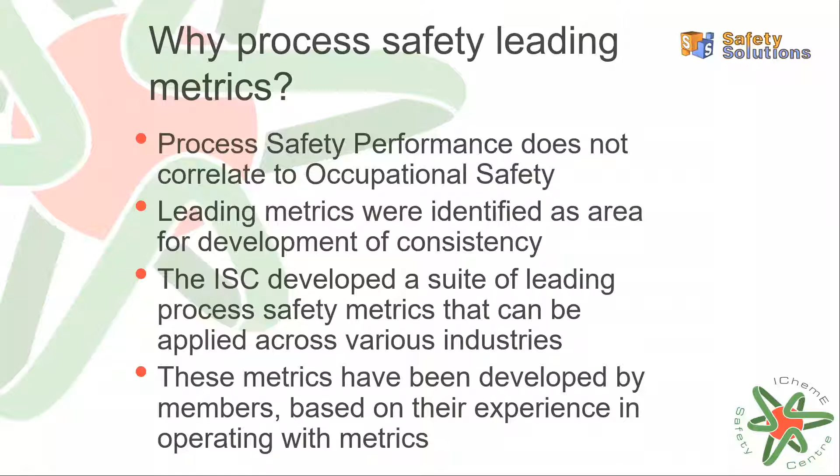This is why we also need to focus on the leading side of process safety, to challenge the green results, and not just be comfortable that we've reached the level of greens in lag metrics and decide that's all we have to do. We have to challenge the system, and also take the message when something goes right as an example, continuously working in other areas to improve based on good results. So it's not all about finding gaps and errors, it's also about finding what works really well in the facility.

So these are the metrics, and you can see the color coding here. These color codes associate with the 6 pillars in the framework. We have all the elements of the framework on the left-hand side, and the associated metrics on the right-hand side. The alarms are associated with human factors elements. These elements can overlap, so some metrics can be associated or related to other areas as well, but we think these are the ones they most crucially belong to.

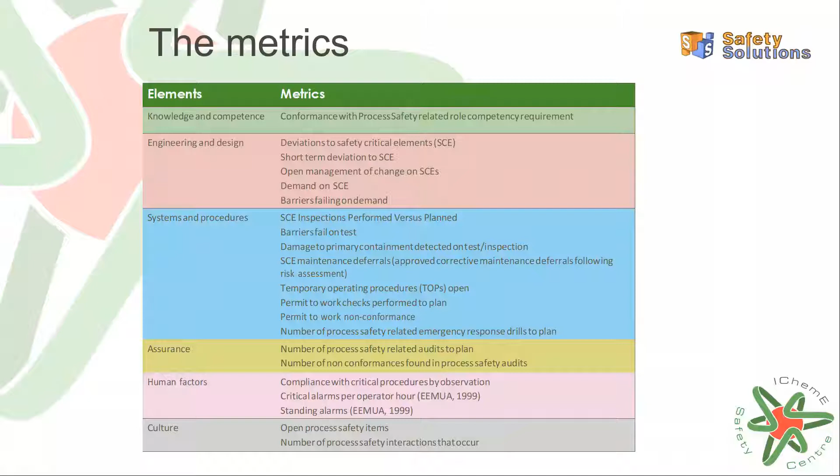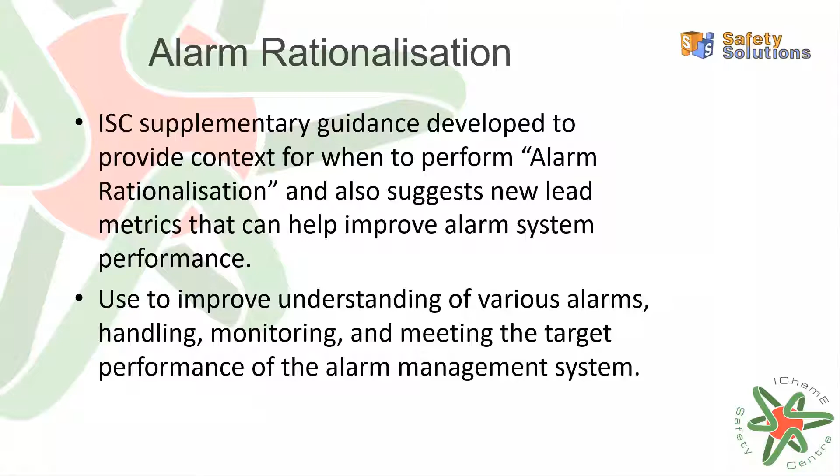So why bother managing alarms in the first place? I'm going to give you a few incidents now where poor alarm management has really been one of the contributing factors - maybe not the major issue, but certainly one of the things picked up by the investigators.

The other reason why you should be doing alarm management is that most industry regulators, if not all of them, will be asking you at some point what you're doing about your alarms, how you monitor your alarms, and how you know your system's good for managing those.

Recognised and generally accepted good engineering practice - this RAGAGEP - is linked into a lot of the codes, standards, and industry regulators' guidance. To give you one example: the HSE UK has a good guidance note, out for about 25 years now, called Better Alarm Handling. You can look that up if you're in the UK, and even if you're not, it's a good place to start, along with some of the other codes and standards I'll show you later. I'm sure WorkSafe here in Australia, NOPSEMA, and other regulators will have similar guidance notes.

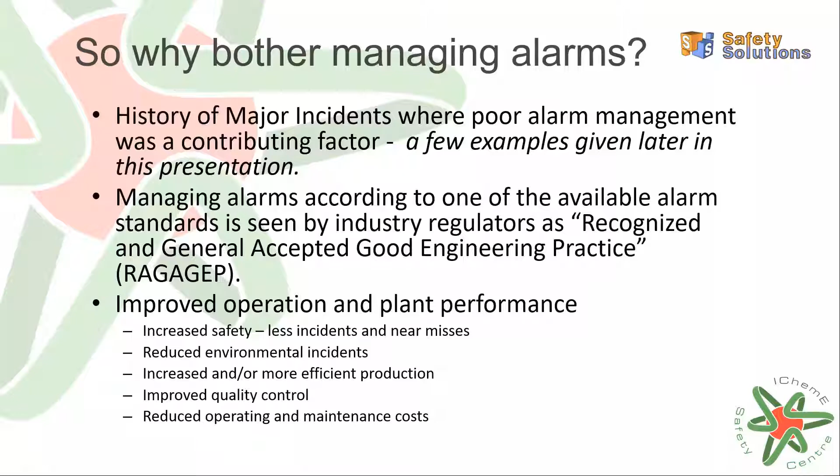The other good reason is obviously to reduce the chance of incidents, or at least give you a chance of reacting in the right way if they do happen. Some of those things listed at the bottom, not just safety but also environmental issues, could be increased production, or less chance of upsets due to incidents on the plant leading to a production loss. Things around quality could be an issue, and also operations and maintenance costs could be reduced as a result of people reacting the right way to their alarms.

The first incident I wanted to talk about was Texaco Milford Haven, which often comes up when people talk about alarm management. This happened in the UK in 1994. A large number of alarms made it difficult for the operator to assess what was going on. I'll talk you through the actual event and then come back to that alarm issue.

In July 94, a series of events led to the accident starting on the morning of Sunday the 24th of July. A severe electrical storm caused plant disturbances that affected the vacuum distillation, alkylation and bituminous units, as well as the fluidized catalytic cracking unit, called the FCC. The crude distillation unit that provided feed to another cracker unit was shut down as a result of a fire that occurred at that time, started by the lightning strike. During the course of that morning, the other cracker unit was shut down, but the FCC was left on.

The direct cause of the explosion, which occurred some 5 hours after that first fire, was a combination of failures in management, equipment and control systems during the plant upset. This led to a release of about 20 tons of flammable hydrocarbons from the outlet pipe of the flare knockout drum of the FCC unit, which was the unit that was left on.

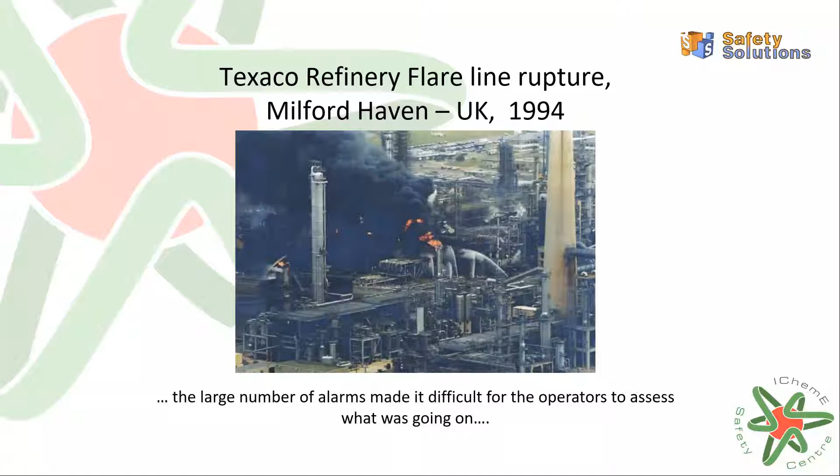There is actually a report available by the UK HSE on their website, HSE.gov.uk. One of the key findings was that the control panel graphics did not provide the necessary overviews to allow operators a good chance of reacting in the right way. There was lots of confusion due to the excessive number of alarms in the emergency situation, which reduced the effectiveness of the operator response. They probably got flooded with alarms, and with so much going on at the same time they were confused, which ultimately led to the blockage and the failure. So that's the first one.

The second one is a bit closer to home for me. When this happened, I was actually in the UK, and this is an incident that occurred in Victoria, near Melbourne, so Longford. I was in the UK at the time it happened, but it went around the world eventually, because a guy called Andrew Hopkins wrote his book, Lessons from Longford, and he actually came to visit our refinery a few years later after we had an incident. It's amazing how these things eventually get around the world. So it's not just about safety, production, and all the other things, but it's also about the knock-on effect to your business and how that affects the wider community and international recognition for the wrong reasons.

So you can read Andrew's book, which is now over 20 odd years old. You can read the IChemE article where Trish Kerin from the ISC interviewed Andrew a couple of years ago. That's available on the IChemE website, called The Long View of Longford.

And the other thing is the Longford Royal Commission, which was the local commission that the Parliament of Victoria asked for, which was published in 1999.

Now I'll give you an overview of the actual incident itself. As you can see here, they had 300 to 400 alarms daily - this was picked up during the incident investigation - and up to 8,500 during an upset condition. All of this was accepted as normal, and this was listed in the findings of the Royal Commission.

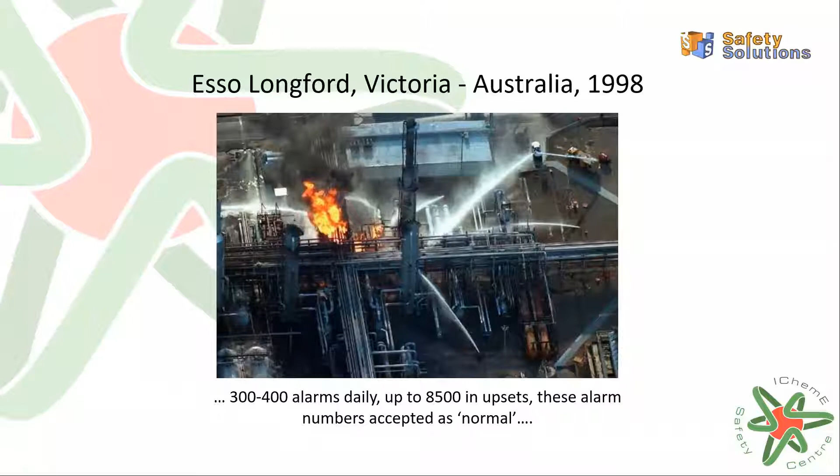Okay, a couple more that are probably more widely known around the world, certainly in the oil and gas industry, in more recent times.

Texas City has been widely used as a case study in lots of process safety courses, including the IChemE Fundamentals course. Again, there's problems with lots of alarms either not working or giving the wrong signals, and some of these were ignored during the incident itself.

Texas City is in Texas in the US, owned by BP at the time, after taking over from Amoco a few years before. It occurred on 23rd of March 2005. A hydrocarbon vapor cloud was ignited and violently exploded at the isomerization process unit at the refinery. Hydrocarbons originated from liquid overflow from a blowdown stack following the operation of the raffinate splitter overpressure protection.

So there were 15 people killed as a result, and 180 people were injured, mostly the local construction village workers who were in a meeting at the time. It was too close to the plant that blew up, and it severely damaged the refinery, as you can see here.

What I'd suggest for anyone who doesn't know about this is to go onto the CSB, the US Chemical Safety and Hazard Investigation Board. Their videos are brilliant for learning from, and one of the ones they've updated a few times is this one on Texas City. If you look in the CSB videos section, there's even ones in different languages now, like Spanish and French as well as English, so you can share that widely and learn from it.

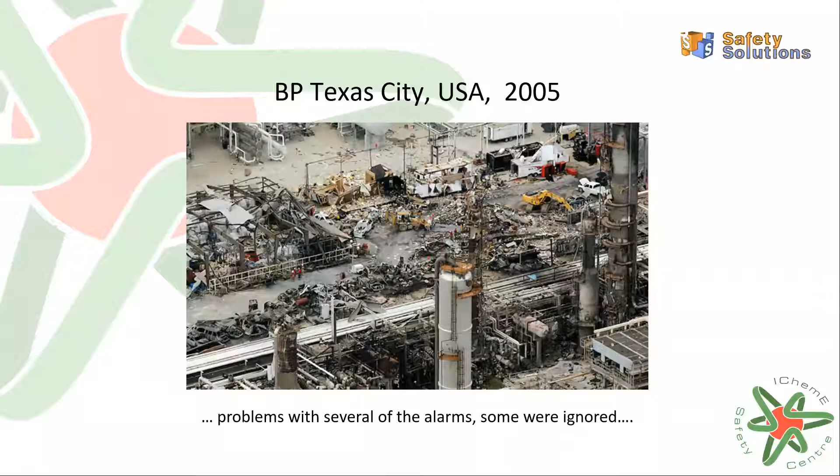Buncefield came up last year when I presented on overfill. Buncefield, UK, same year as Texas City - a bad year for process safety incidents. There's a lot of information on this one as well.

I'll go through exactly what happened. The massive vapor cloud explosion, which measured 2.4 on the Richter scale - so huge - occurred at the Buncefield fuel depot near Hemel Hempstead in the centre of England. It's close to the M1 motorway, one of the main motorways down to London and Heathrow and those sort of places.

In the morning of 11th of December 2005, it was caused by an overflow from one of the storage tanks, resulting in a large release - over 300 tons of gasoline - and many other tanks and businesses were damaged nearby. There was all sorts of other things as a result, as well as the explosion. But one thing that didn't happen was there were no fatalities, and I think that was more luck than anything else, because it happened at 6 o'clock in the morning on a Sunday. You would think any other day of the week or any other time it would have caused significant fatalities, particularly as a lot of the businesses and cars were crushed nearby.

So one of the main things, as it mentions here, the tank level instruments and alarm trips were not working at the time. So even if they had got them, they may not have had enough time to react, or they just weren't working. And that seemed to be, from what the investigation found, that there was a concern from contractors to site managers, but they didn't do anything about it, that these independent high level switches weren't working, or hadn't been fitted with the right padlocks and things to make sure they were tested.

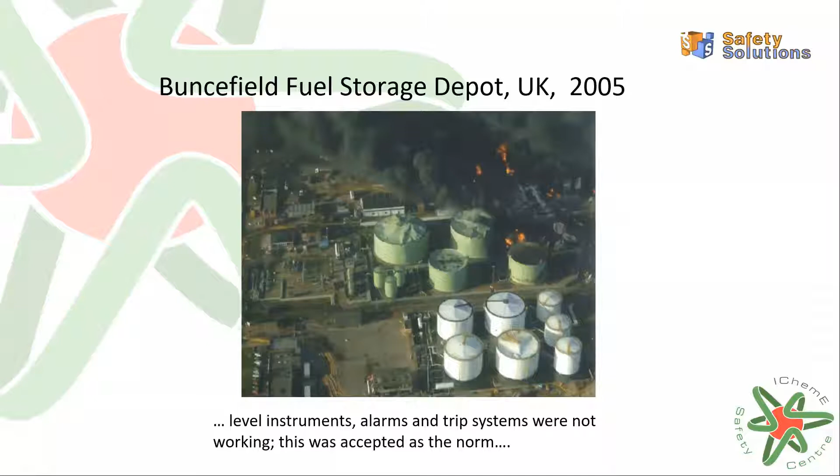Okay, the final one I'm going to go through before I go back to the main crux of today is the Capeco fuel terminal, which is very similar to Buncefield, but it happened 4 years later, and almost exactly the same thing, and lessons weren't learned in between. So if you watch the CSB video on this one, I think it's called Filling Blind, you'll be able to see what happened at Buncefield and Capeco, and hopefully learn from that, and look to improve your alarm systems as a result, and your trip systems.

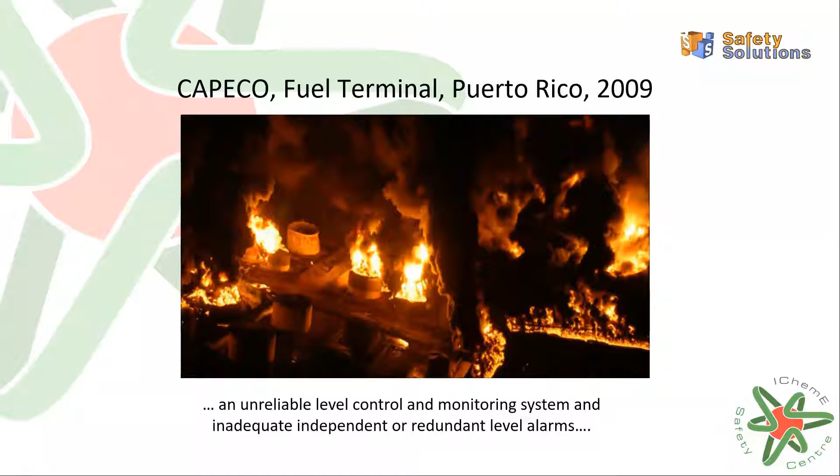Okay, so I went through all those quite quickly. The next thing is a little video clip, and I'm not sure whether the sound will share with everyone, but this is from the China Syndrome. Now, the China Syndrome was a film back in the 70s, and you go, 'Oh, why, Garry, are you mentioning this?' Well, it's because it sort of shows a control room situation. Yes, it might be an old control room and not look like the ones we build today, but there are actually quite a few like this around the world that still exist.

So it's just to show you really how this guy Jack Lemmon, who's one of the main actors in the film, how he reacts to it, and he sort of goes around. He has to check various things. He tells the other operators to do certain things, but if he can't hear it, basically all the alarms are going off all across the panel at the top, and he can't hear himself think. And by the end of the clip, he's telling them to shut it down. So I'll quickly run this, just to see what can happen in an emergency situation. Then I'll tell you a bit more about it.

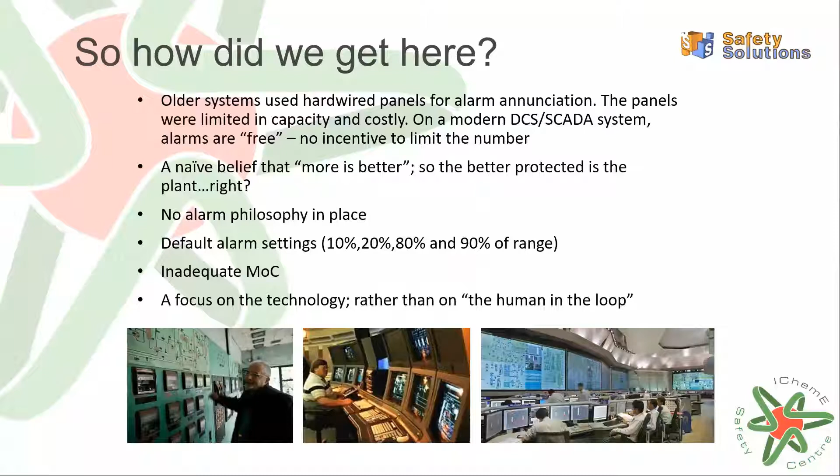And there's a focus on the technology. So you can do all sorts of whizzy things now on the modern DCS screens, but for a long time, they weren't focused on the human in the loop. And that's where we're trying to get back to over the last 10 to 15 years, to recognize there is actually a human in that loop that needs to react to the alarm and do the right thing. So some companies don't take any credit for the human reaction to alarms because they don't think they've got enough time in an emergency situation. Other companies do. So we'll talk a bit more about that as we go on.

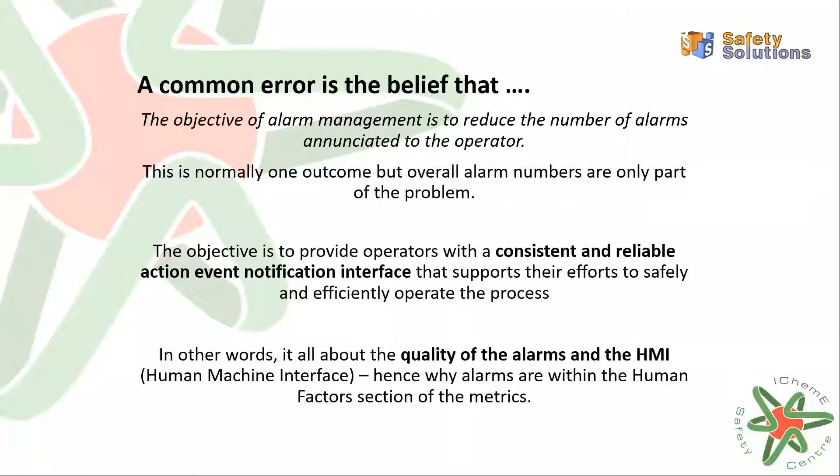So I'll probably skip around this one. I've talked about this one, but basically there's a common error of the belief that alarm management or alarm rationalisation is just to reduce the number of alarms. So it's actually about the quality and getting consistent, reliable alarm notification systems, rather than just removing alarms left, right and centre. It's also to work out why they're there and that they give you a quality outcome that the person can react to.

So getting a bit more into alarm management now. So when you read the codes, and I'll come back to those to show you what the codes are in a minute, and a bit more about the guidance, there's various terms you'll need to know to start with. So obviously I mentioned alarm philosophy, so you need one of those. You also need to know what your alarm priority settings are going to be, or how you're going to work out what your priorities are.

And then usually you come to some sort of risk assessment to do that. And then you look at safety, environment, production loss, all those other things to give you the priority of the alarm, if that's part of your layer of protection philosophy. You can also look on your bow ties and other things to work out if the alarm is one of the things you need a critical response to, or procedures that call for a reaction to an alarm.

So most of the other things on here are either types of alarm or they're some of the metrics you might talk about, alarm rate. But really just get your heads around this when you're reading the codes and the standards. There's lots of definitions and there's another set of definitions in the guidance note from EEMUA. So just get your head around what all of these things are and what they mean in terms of your system and how many of each of these types you've got.

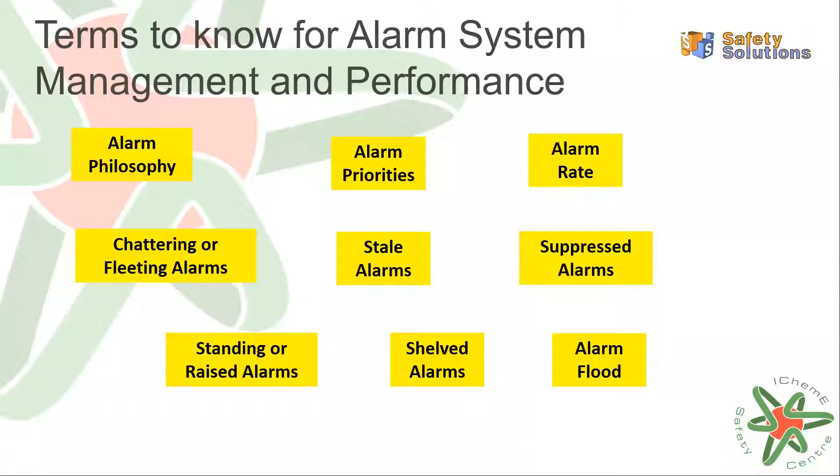So you also need to understand, like I said, where the alarms fit. So it's not just about the alarms, it's about the whole control loop. So the process, you'll have some sort of operating window. So it might be a window of flow or pressure or temperature or level, and you'll have upper and lower bands or somewhere where you want to try and stay.

So you've got safety instrumented functions, you've got trip functions, those sort of things in place. You'll probably have a whole bunch of physical protection as well. Relief systems, rupture discs, you might have bunding if it's an environmental incident, flare systems, etc. But once it gets out the pipe or the loss of control, maybe it's a reaction that's gone runaway or something, then you're into mitigation, emergency response.

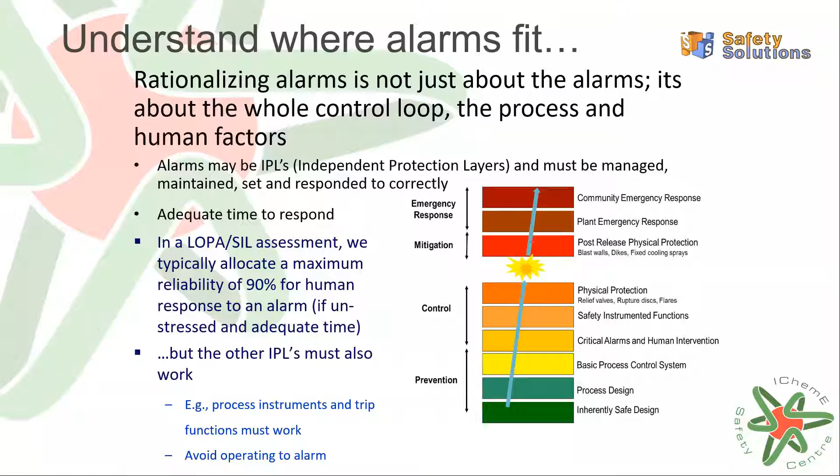So it is a bit of a team effort to do that, and it can take not just weeks or months, it could take years. And it's also a constant effort to try and keep things in check, because as you modify the plant or the facility, as you add more alarms, as you take alarms out for some reason, if you're doing a rationalization, all those things need to go through management of change. It's not just a one-off project. This is sort of something that needs to be resourced for the whole life of the plant, really.

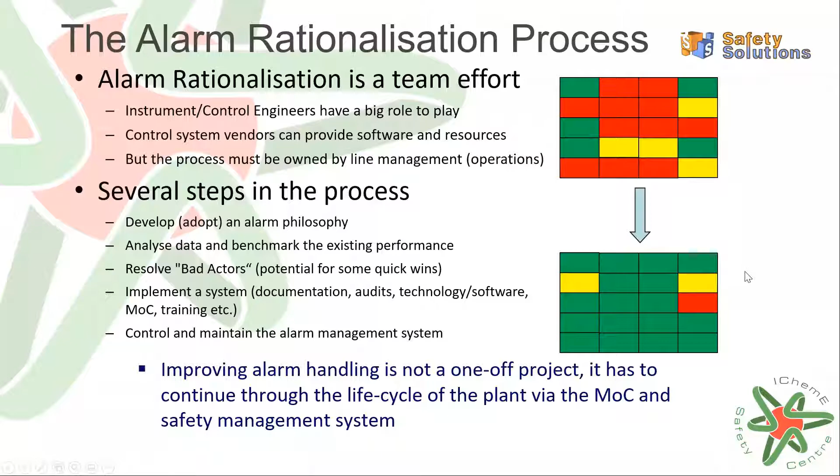The alarm management life cycle now. So this is going more into the guidance that's out there. So the EEMUA Guidance 191. So EEMUA stands for the Engineering Equipment and Materials Users Association, which I had to look up again to remind myself. So EEMUA 191 came out many years ago. The most recent edition is 2013, I think, which is edition 3. So that's one of the things that first came up with the life cycle.

And then on the side of that, you've got management of change, and you've also got a need to monitor and assess. So that's where the metrics come in. And alongside the whole of that's auditing. So you can audit your alarm systems as well, occasionally, to make sure they're all doing the right thing and the whole management system is doing what it's supposed to do.

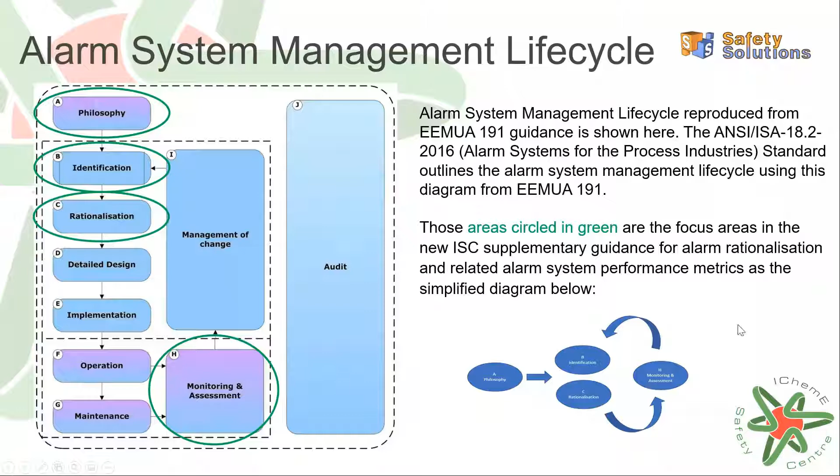So yeah, I think I've given you the code. So if you look up EEMUA 191 or the ISO or IEC 62682, those two will give you a lot of information on alarms that you can use, and that's also referenced from the ISC guidance.

So the EEMUA defines robust alarms as reliable during all plant modes, including normal operation and plant upsets. So even during normal operation, you need to be monitoring things, making sure they're not overloading your plant. And the operators have a high degree of confidence, so they're not doing like some of those incidents where they just had so many alarms, they're just superfluous. They don't really think about them anymore. They're just there and they shelve them.

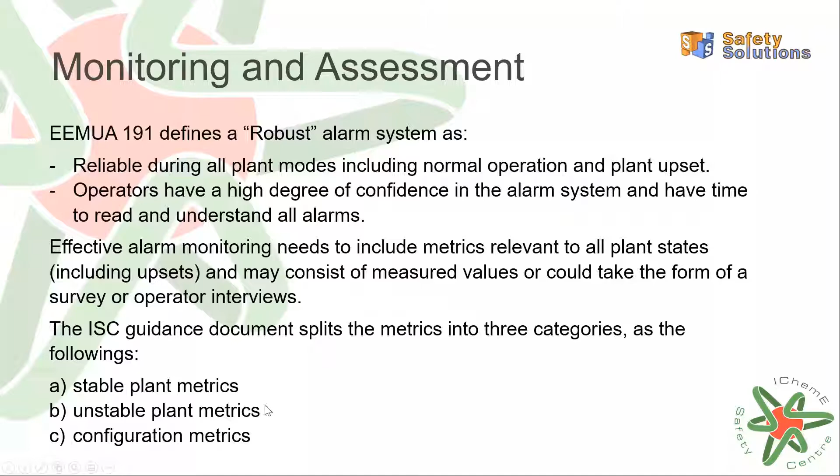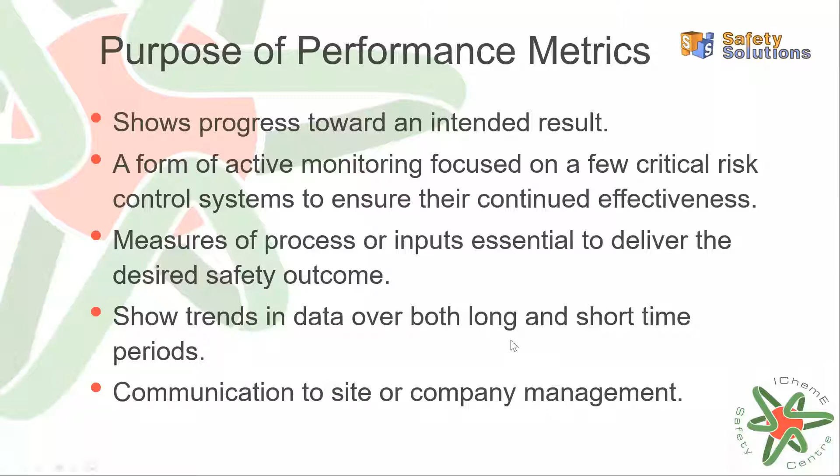So he's talking here about you need a monitoring system, and that's where the metrics come in. So the ISC guidance note has three different areas that it focuses on for the metrics: stable, unstable plant, and configuration metrics for the whole system. So we'll go into that a bit more now. I probably won't go over why you need performance metrics again. That's really what Susanna covered at the beginning.

As I mentioned before, the metrics guidance is focused on helping to do the rationalization process and probably identifying a few bad actors before that. So using these metrics will sort of lead you to where the target areas are to start with. You may still need to do full rationalisation, or you may even have to do advanced techniques or enhanced things like flood suppression or other system modifications to make sure that in an incident the operators can still react in the right way.

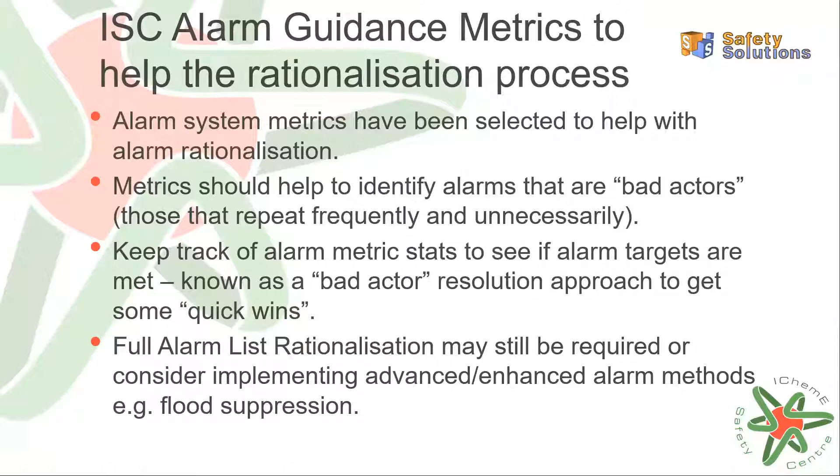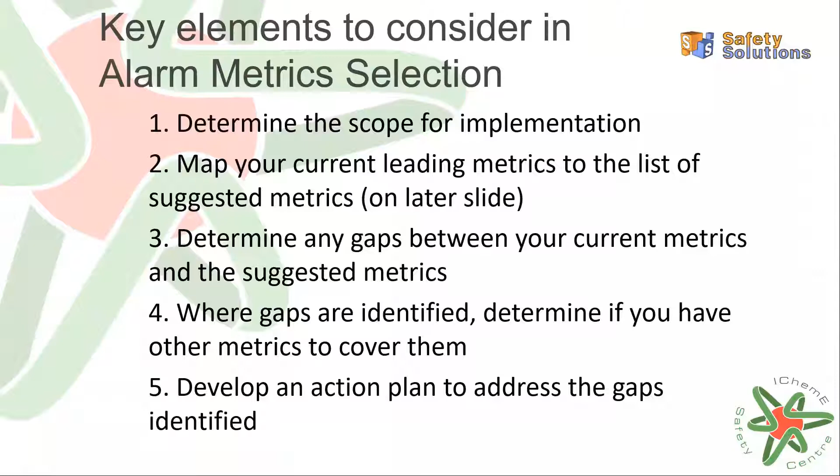Probably won't go through these steps right now, but this is all in the guidance note to say what you need to do to start and get through to an action plan to address any gaps in your alarm system. Yeah, there's a lot more detail in the guidance note. So basically these five steps are all split down and say how you can go about using the metrics and how to identify gaps and go about your alarm rationalisation exercise. So I'm getting towards the end now. The last few slides are around the actual metrics themselves.

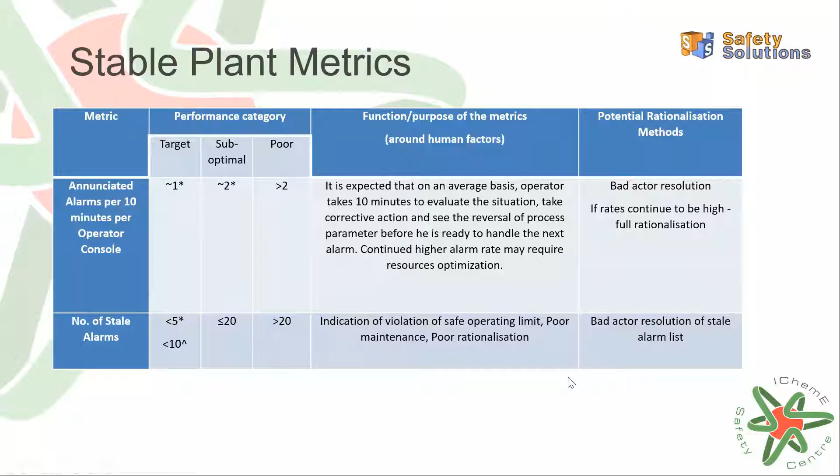When you get into unstable or plant upset type conditions, you expect there to be a lot more alarms. Again, you can measure those when you have the upsets and get some lessons learned from the incident that you can feed back into your alarm system. So there's numbers here for the number of alarms in that upset condition, and you see it's a factor of 10, maybe higher than normal operation. And the other thing you can look at is percentage of time the alarm system goes into a flood condition. And there's definitions around what flood actually means, so you can look in the guidance notes.

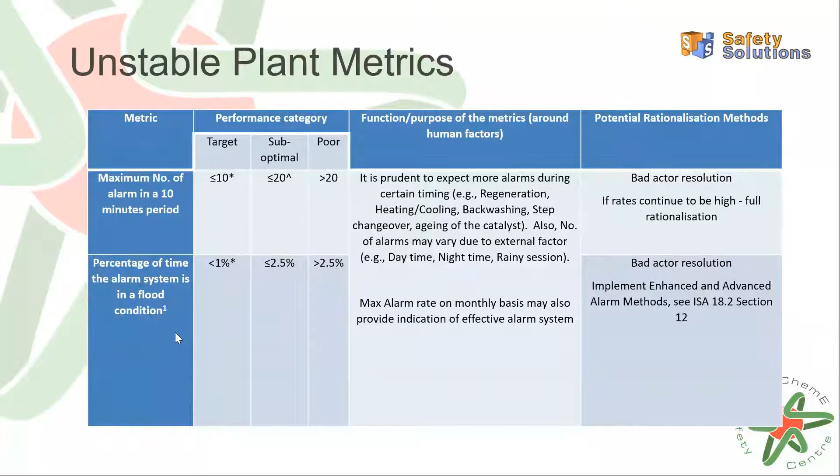The other one that's good to look at, as well as stable and unstable, is configuration. So this is looking at the whole system for bad actors, and also the distribution of priorities of those alarms. Like we said at the start, if everything's high priority, what does the operator do in an emergency when everything comes up at the same time?

So if you look at all the priorities across the board of your alarms and which ones you think are going to come up for a particular area of the plant during an upset condition, then just look at the percentage of each type. It's up to you how you define high, medium and low, but there is a lot of guidance around that in the EEMUA, ISA, and the guidance we've put together.

But if you're really way out of these bands, you probably need to go to full rationalisation. There are things you can do around the edges though, in terms of chattering, fleeting alarms, things that come in and out all the time that are just causing a distraction. If you can get rid of some of those, that helps in emergency situations as well. You can also have a hit list of the top 10 alarms that go off most often and try to get rid of some of those, so it doesn't add to the flood when things happen.

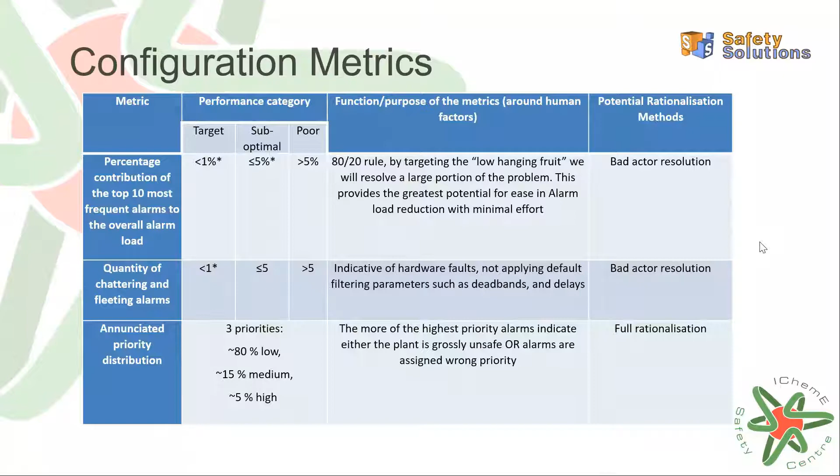I think that's most of what I wanted to cover, so I'll do a bit of a wrap up. As I mentioned halfway through, when it comes to alarms, more is not always better. So when doing design and management of change, think: do you really need the alarm you're about to add? A bit like when you do QRAs on P&IDs and do your parts count, you can also do a count of all the alarms and work out whether you really need all of them, what they're there for. Link that back to your HAZOPs, LOPAs, bow ties, and other risk assessments, and make sure you really need them before you add them.

Make sure they're actually defined properly too, so you're handing over a quality product to the end user. As it says here, all changes to the alarm system must go through MOC, and they must meet the alarm philosophy - so if you haven't got one, that's not good. The other thing is to hand over the alarm philosophy to the designer or whoever's doing those changes. You may get some quick wins from bad actor resolution - identifying alarms that come up most often or cause the most grief, dealing with those first, then seeing whether you need a full rationalisation of all your alarms or just subsets to focus on.

It says here you'll get an optimal set of alarms, keeping the process operating within the safe operating envelope. So you need to define what your safe operating envelope is first, and then define where the alarms are in relation to that. Hopefully that will mean operators aren't overwhelmed with nuisance or confusing alarms in those unstable conditions.

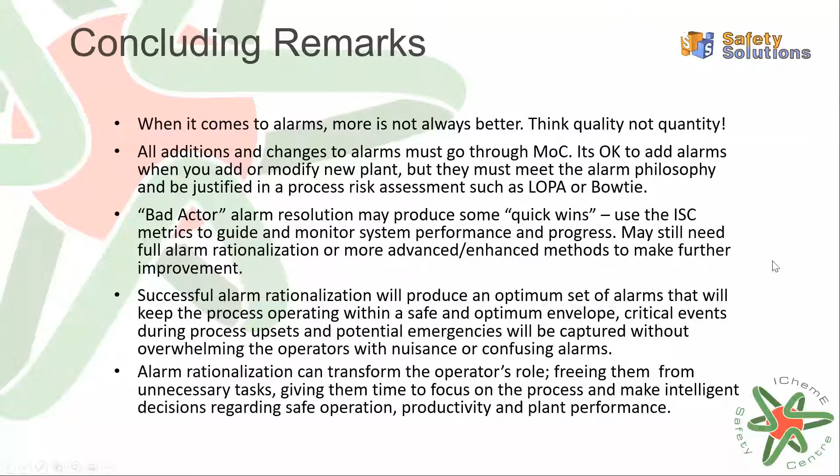Thanks a lot, and thank you for going through the guidance document, and especially for presenting all these past incidents, which we always have to remember, because otherwise we can't improve the systems if we don't learn from these past incidents. And lead metrics may be able to help or contribute to that mission.

So the common lead metrics actually allow for consistent measurement and reporting, which addresses the lack of consistency in lead process safety metrics I mentioned earlier. This also helps if you want to benchmark between companies and industries, because you're speaking the same language.

And maybe it's even possible to identify good practice or best practice. I prefer using 'good practice,' because that gives you motivation to keep becoming better and better. And watch out for watermelons.